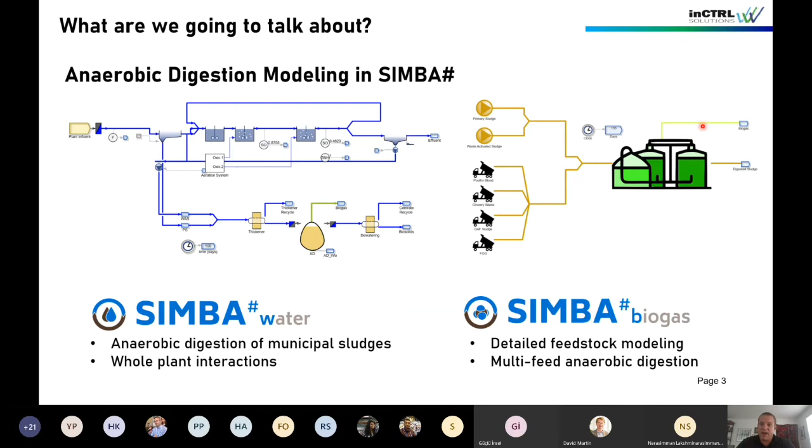In addition to the feedstock side, which is a big focus of today's talk, additional features of SIMBA Biogas are at the downstream end with the biogas handling. So we have a system of piping network, valve blocks, compressor blocks, and gas storage blocks, which can be really useful for the dynamic modeling of how you actually handle and get the most profitable recovery of that biogas for your purposes.

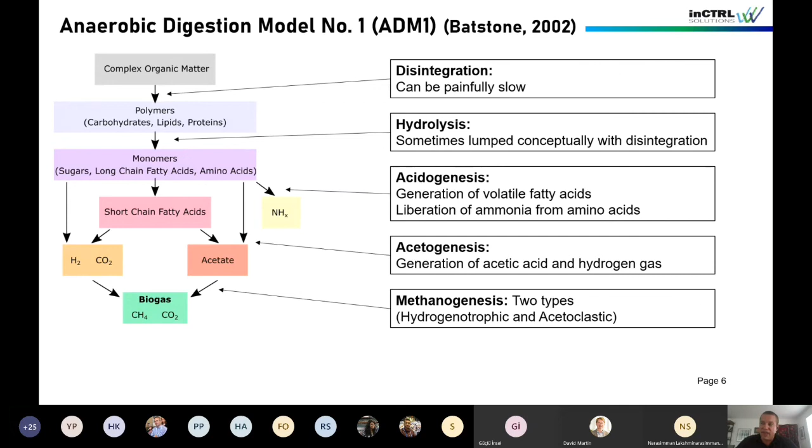And then you have the acetoclastic methanogens that break down acetic acid, both of them generating the methane that we could then recover either for purification into biomethane or the generation of electricity, or in a worst case scenario, you just flare it.

I would just want to say with the caveat, is the anaerobic digestion model one the whole truth? No, absolutely not. Anyone who's on this call who has worked with digesters or who has studied microbiology knows that the microbiology, the consortia, and the types of metabolic functions in these digesters are really complex. You have other elements that are being transformed apart from just the carbon and the nitrogen. You have sulfur and phosphorus and so forth.

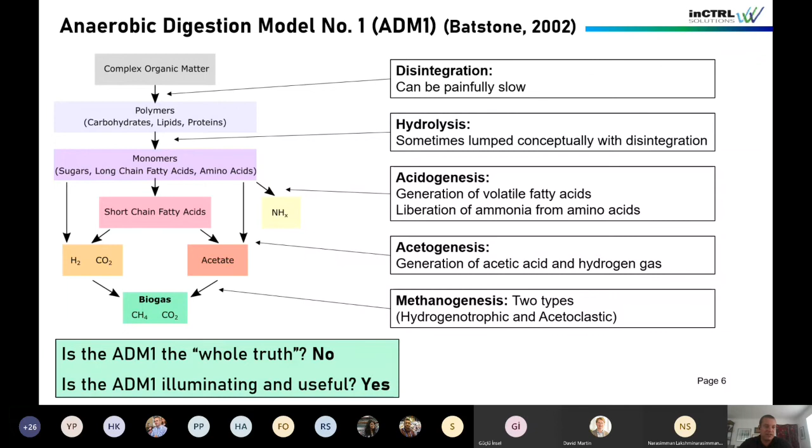But the second point is that even with those simplifications, is anaerobic digestion model one illuminating and useful? Yes, absolutely. It's a powerful stoichiometric and biokinetic model to predict the dynamics and to perform dynamic mass balancing in anaerobic digesters.

What we have done is we've made an adaptation of the anaerobic digestion model one. The main difference is that we allow a more detailed fractionation of that complex organic matter into slow and fast disintegratable carbohydrates, fats, and proteins. And what this allows us is distinct characterization of each feedstock that you're modeling. State variable concentrations affect the process kinetics. So you can see the 42 state variables and then the 30 dynamic processes. And then your processes are going to affect your state variable concentration.

So a bit academic, but if you were to use SIMBA Sharp, this is the model that would be underneath in SIMBA Biogas. You can open this file, you can edit it, you could add new processes, new state variables, change parameters. We often don't recommend changing those parameters, but it is an open software, you could do that. And what a dynamic simulation platform like SIMBA Biogas does is a numerical integration of this entire process matrix to predict the dynamic behavior of an anaerobic digester.

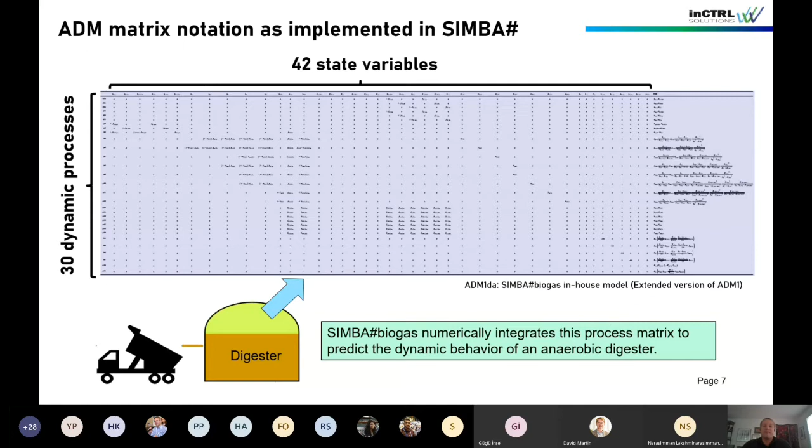So then the question remains, okay, I've got this digester and I'm throwing all this organic stuff into it. How do I turn these glass jars of sludge into variables that are compatible with this anaerobic digestion model? Essentially, how do I map things that I might measure in a laboratory to this row of 42 state variables?

And so what we have is an approach to model feedstocks in SIMBA Biogas where we answer three principal questions. What is this feedstock made of? So what is its organic composition? The second, which we won't go into in too much detail on this call, but we can talk about offline if anyone's interested, is what is the buffer chemistry of the feedstock? So ammonium and bicarbonate, et cetera. And then the last is we know what's in the feedstock, but we need to know what is the degradability of the feedstock. So three main things.

So to answer that first question, we actually go way back. We go old school and we use the proximate system of analysis of feedstocks that was first developed in 1860. Now, this has been debated extensively over the last 160 years, but it holds up really well, and it's a very common system of analysis for animal feedstocks in the nutritional sciences field, and now for anaerobic digestion modeling. And essentially, you're breaking down your feedstock into 6 main components.

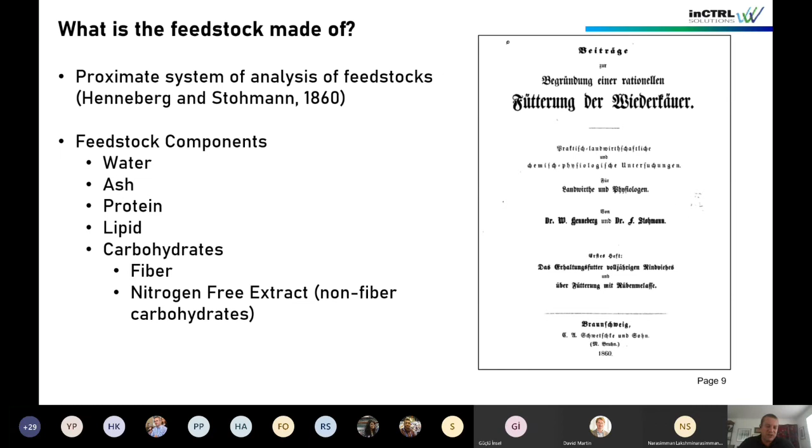Okay, so we'll move on from what's in the feedstock. So let's say you've got an estimation of how much protein, fat, carbohydrate, ash, and water you have in your feedstock. What you wouldn't know yet is whether you can throw that substance into an anaerobic digester and actually generate methane. And so what we rely heavily on when we're modeling feedstocks is the batch kinetic assay that's very common. It's called the biomethane potential test.

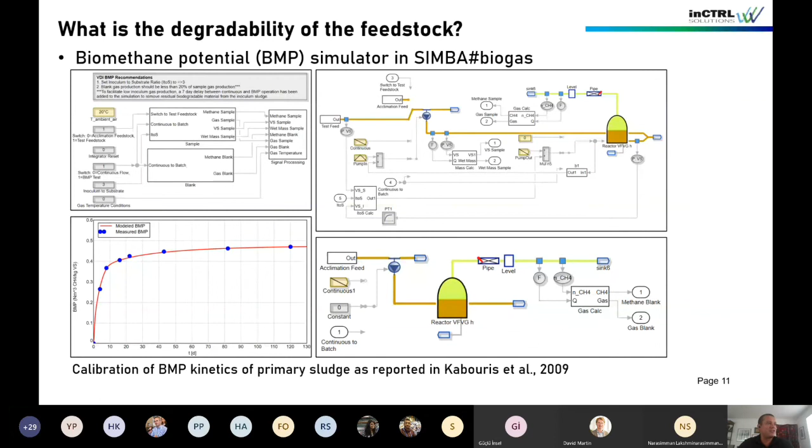And now we can have a very well calibrated sense of how fast is this feedstock going to degrade and what's its extent of degradation going to be in our model. The other images just give you a sense of some of the complexity of what this model would look like in our simulation drawing board. A lot of lines, looks like spaghetti, but with a little bit of time, you can sort of understand how it works in practice.

Okay, so I know that if someone was showing this to me, they'd say, that's great, but generating that data for a bunch of feedstock sounds like a lot of work. And I agree with you. And in some of our initial projects, it was an immense amount of work. In fact, even in municipal wastewater modeling, it's an immense amount of work just to get proper characterization and calibration of your influent. So imagine doing that not for one influent wastewater stream, but for 50 or 60 feedstocks that are coming into a facility on a regular basis.

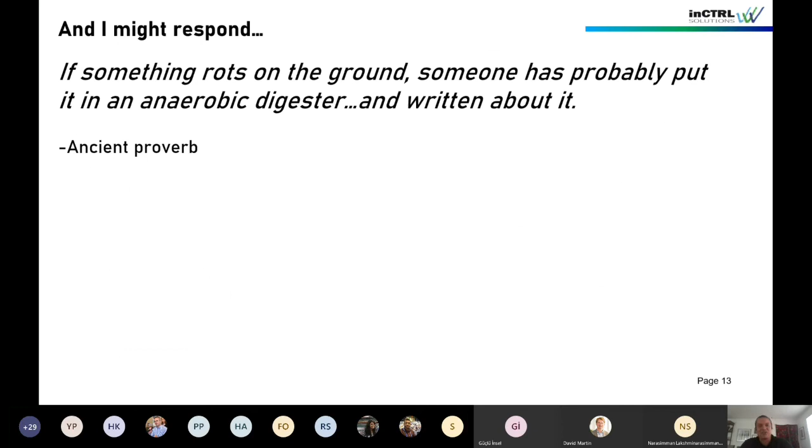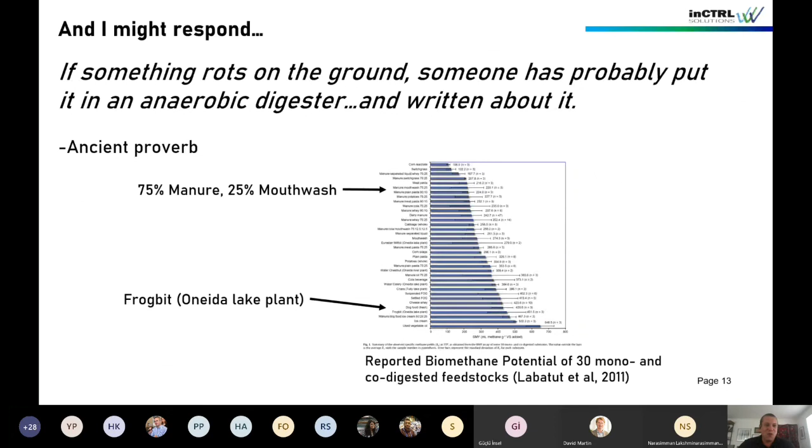And so what we've done as an internal development effort is we are continuously updating a database of anaerobic digester feedstocks. And more importantly, we're going through the effort of data sanity checks, identifying discrepant data, and standardizing that data in terms of units and making sure that we have the variables that we need so that then we can run it through the very standardized, very routine calculations that we would use on those laboratory data to generate the state variables we need to characterize that feedstock in a SIMBA biogas model.

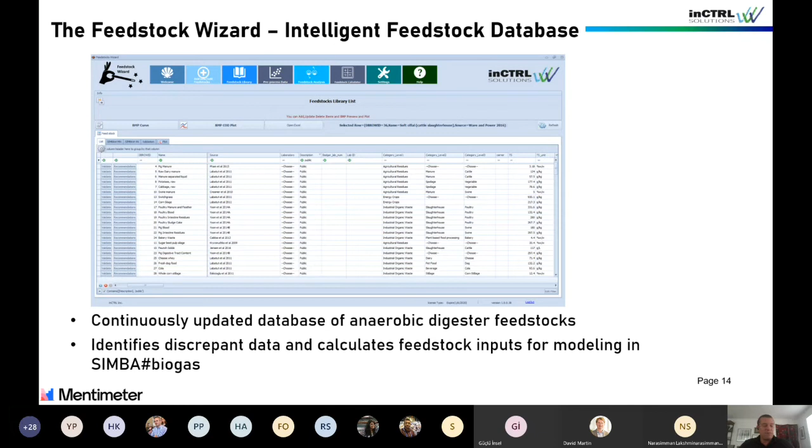And so there are a lot of other use cases for a software like this. But in terms of how it relates to what we're talking about today, which is the predictive modeling of biogas plants in SIMBA Sharp, the most important use case in my mind is to be able to have lab data at your fingertips and not have to take out a notebook or a calculator and calculate all those parameters every single time you want to set up a SIMBA model. And so that's what this software is doing for us; it just automates that process, makes it a lot more efficient.

Okay, so before going on to the case study, I actually want to do something a little different. We're just going to have to see whether this actually works, because I have not done it with this big of a group. This is actually a game. So we're going to compete in a quiz. The questions are not too crazy. You can pick any name you want. You can use the default name, or you could punch in Dr. Fauci, you could punch in Beyonce, anything you like. I'm going to use the default name Joanna, and I'm a koala bear. I won't answer. I don't want to cheat because I wrote the questions. Okay, so we got 26 participants. I think we're ready to start this quiz, based off of what we've been going through.

Okay, answer fast to get more points. Which will digest faster? A piece of raw meat or sugar water?

Okay, I was trying to be generous. We could take our time, but it looks like the text in the question was slow. There were only 2 answers, so it looks as if we've got a complete set of answers. And let's see. Okay, 20 out of 24 got it right.

Yes, sugar water. The reason being is that a piece of raw meat is, again, a complex piece of organic matter. It's going to have to undergo disintegration and hydrolysis before it will go through any of those other subsequent steps of anaerobic digestion. Whereas sugar water, this is already sugar. It's an organic monomer, so it's a carbohydrate that's already undergone hydrolysis.

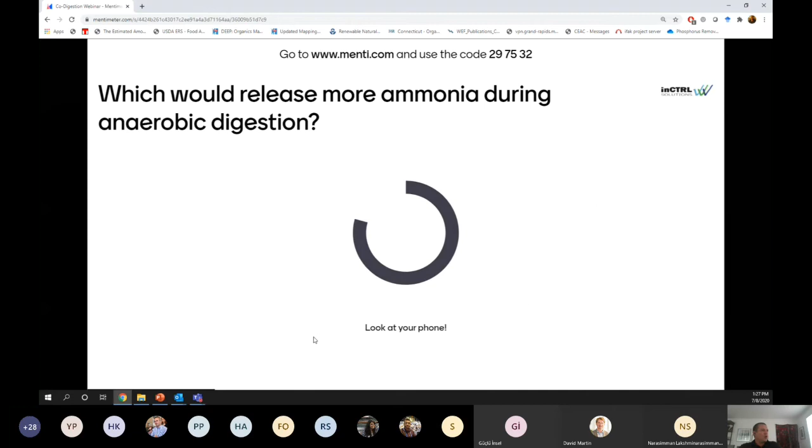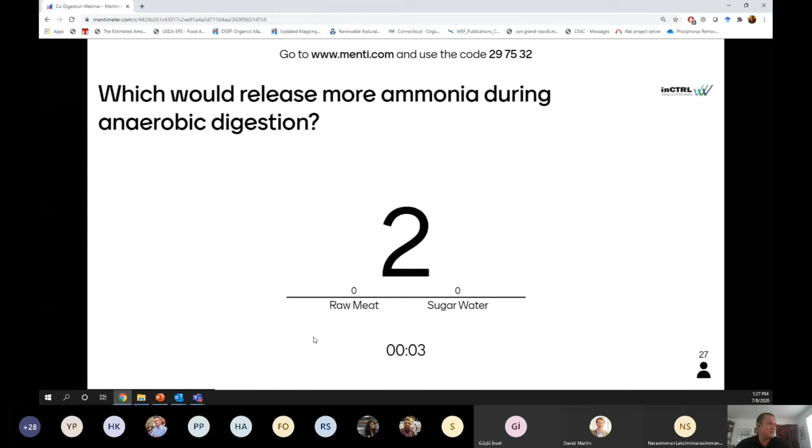Okay, let's move on to question number 2. Which feedstock would release more ammonia into the digester during anaerobic digestion? Again, raw meat or sugar water? Okay, looks like we've got a complete set of answers. Just need a few more seconds before the question times out. And perfect score, 27 out of 27, yes.

For those of you who eat meat, I do, it contains a lot of protein. Sugar water, to my knowledge, contains no protein. And it's the degradation of proteins in a digester. Proteins contain the nitrogen. That's what's going to release ammonia into the digester. This can have an impact on feedstock selection, particularly if you're concerned with the recycle ammonia loads back to your water resource recovery facility.

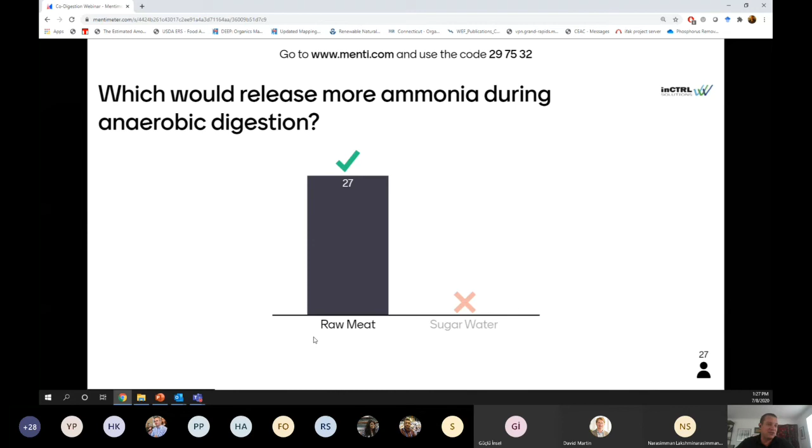Let's see, do we have a new leader? The boss has tied Heartstorm. Okay, well, at least on question 2, Heartstorm still has a 2 point lead.

Okay, question 3. There's a total of 5 questions. Believe me, I'd be perfectly happy to do this for the rest of the webinar, but we do have a bit more technical content. Which has a higher biomethane potential? Hope most, if not all of you, know what these foods are. You've got New England clam chowder, a very hearty soup with potatoes, ham, clams, cream, and you've got low-fat vegetable soup, water, vegetables, maybe salt.

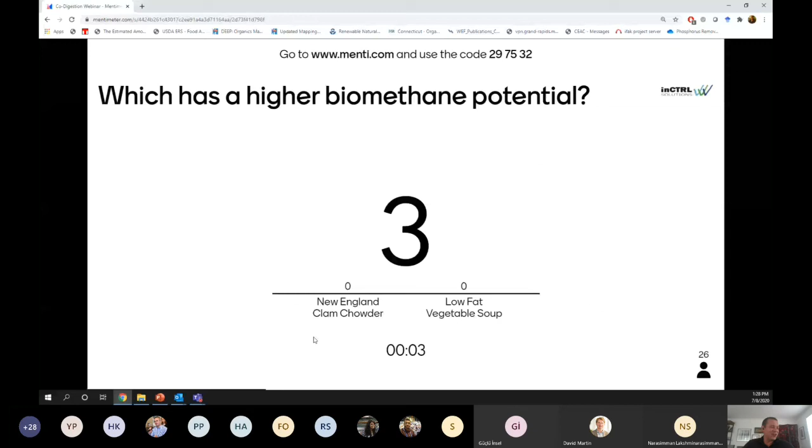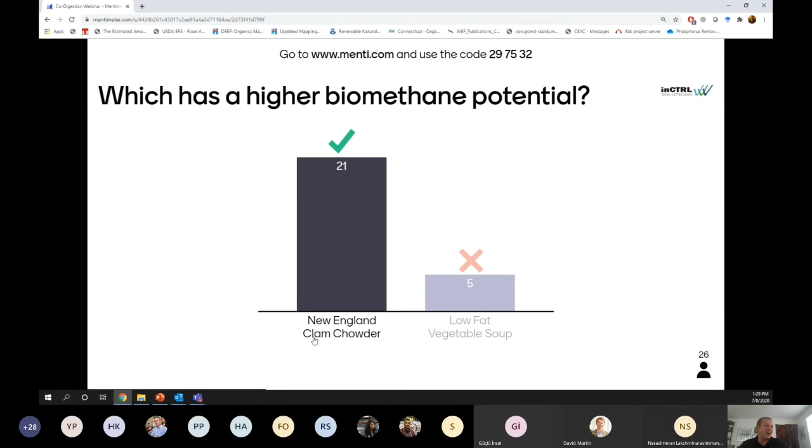Okay, yes. Okay, maybe a little bit culturally biased. I do live in Connecticut, New England, but yes. If you want to know which one is going to release more methane during digestion, a helpful thing to do is just take a look at the nutrition label, look at the calories, look at the fat, the protein, the carbohydrate content. That's going to be much higher in something like New England clam chowder.

Okay, question 4. Well, let's take a look first at who's in the lead. Uh-oh, Boss has claimed first place. Heartstorm has slipped to 3rd. SA is up to 2nd.

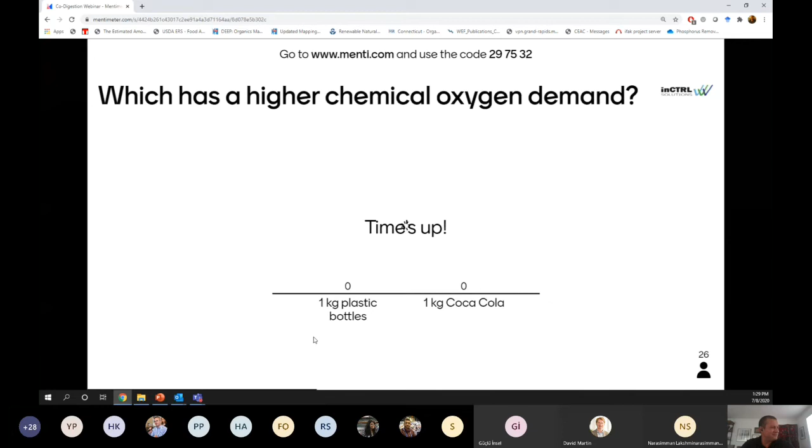Okay, question 4. Which has a higher chemical oxygen demand? 1 kilogram of plastic bottles or 1 kilogram of the Coca-Cola that was poured from those plastic bottles? Okay, we've got our first tough one. This is chemical oxygen demand rather than biological oxygen demand or biomethane potential.

Plastic is essentially 100% organic matter. So it is going to have a very high chemical oxygen demand. If you were to incinerate it, I don't recommend that you do, you would release flames and a lot of heat. Whereas with Coca-Cola, even though it does have a high sugar content, it still is mostly water. So the actual organic content of Coca-Cola is relatively low compared to plastic.

So let's see, I got a feeling that whoever answered that first is probably going to hit first place. Okay, SA has pulled into the lead.

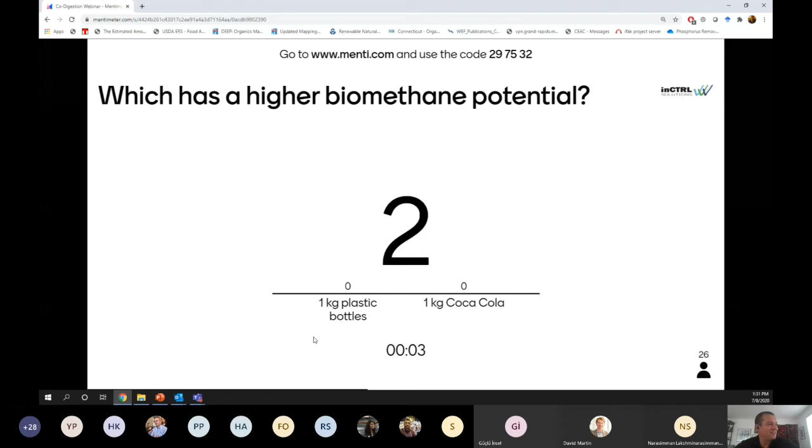Okay, all right, last question, and it's related to the previous one. Which has a higher biomethane potential? Again, 1 kilogram of plastic bottles or 1 kilogram of Coca-Cola? Yes, Coca-Cola. Coca-Cola is biodegradable. Generally speaking, plastic is not.

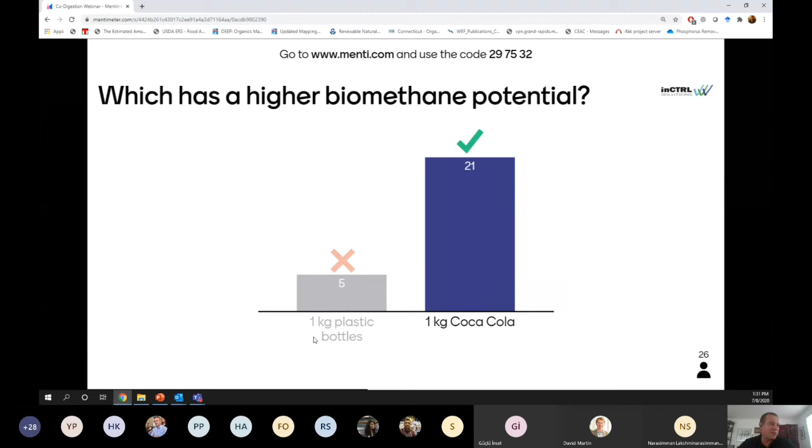There may be some newly developed plastics that are biodegradable. If that's what you were thinking when you answered it, I apologize. But in general, I would not recommend putting plastic bottles into your anaerobic digesters. There are companies, especially equipment manufacturers, who sell a lot of pieces of machinery just getting all that plastic crap out of your feedstock so you can put them into your digesters without problems.

Okay, so who is the champion of our anaerobic digestion quiz? It is Mr. Anderson. Okay, Mr. Anderson, if you want to reveal your identity at some point during this webinar or after, please do so. But congratulations and excellent job on our co-digestion feedstock quiz.

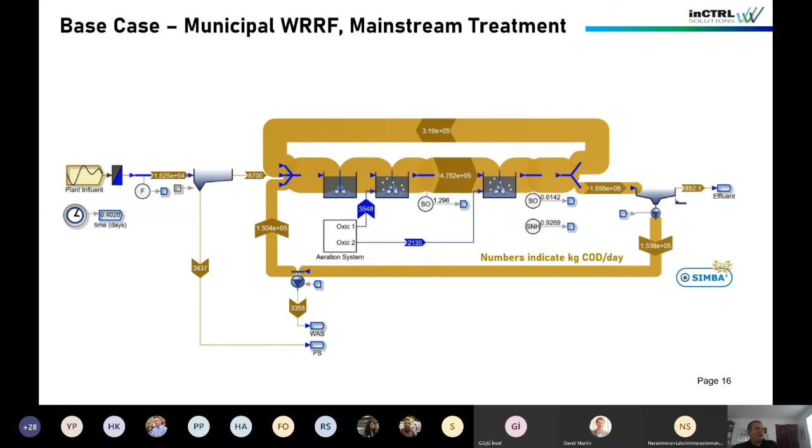Okay, back to more serious matters. Right now, what I want to do is go through a hypothetical case study of co-digestion at a municipal water resource recovery facility. Okay, so we'll lay out some of the facts, the base case about this facility. What we have is a flow rate of 20,000 cubic meters per day, as a rough estimate. That's about a town of 50,000 people in the United States. A COD load of 12,000 kilograms per day, and a total Kjeldahl nitrogen load of 1,000 kilograms per day.

We've got our activated sludge process, and if you tuned in for webinar 1, which was Oliver talking about aeration system modeling, and you run this facility, you've already optimized your aeration system, you've got really good diffuser distribution in your 2 aerobic tanks. You've applied most open valve control so that you can supply air at the lowest possible energy.

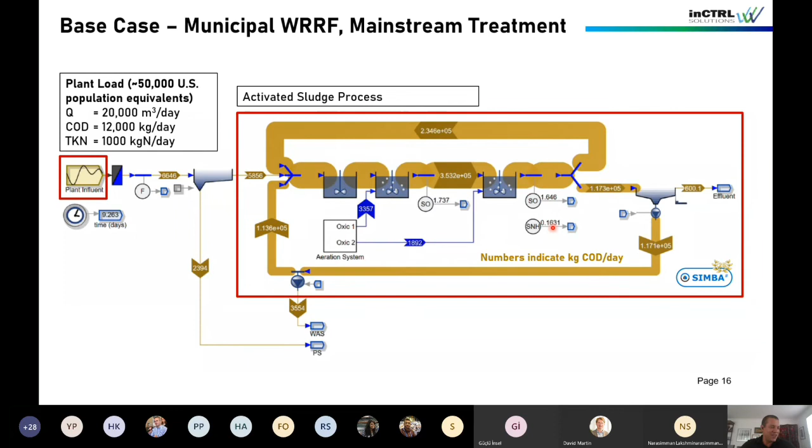Then you followed up by watching Live's webinar, which was a few weeks ago. You've got your online sensors deployed, your dissolved oxygen sensors and your ammonia sensors. They're commissioned, they're well maintained, they're measuring accurately, and you're confident enough in them that you wired them up into an ammonia-based aeration control system. And so you've got a really nicely operating plant for total nitrogen removal.

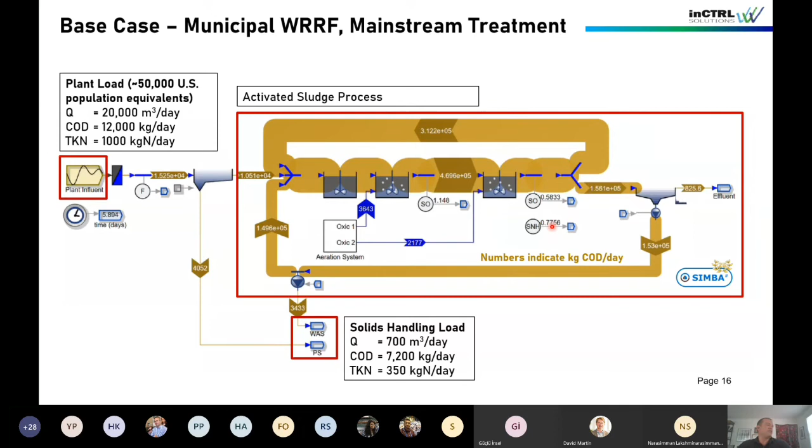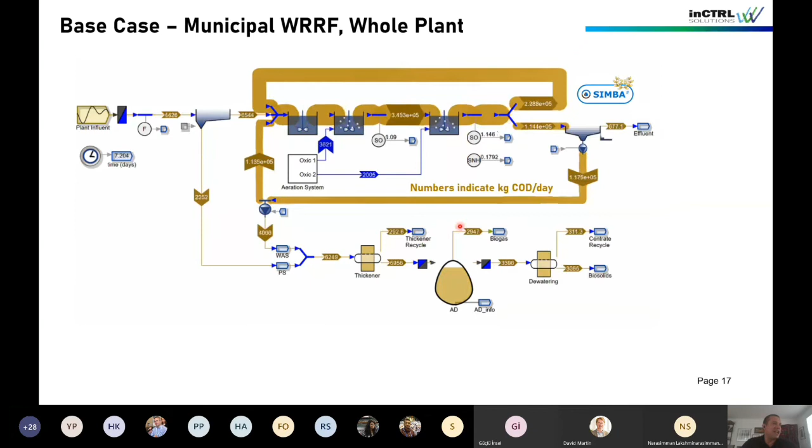Okay, and now in your path towards optimization, you're looking at your solids handling. What you've got right now is sludges from your waste activated sludge line and your primary sludge line of 700 cubic meters per day, COD of 7,200 kilograms per day, and a total Kjeldahl nitrogen load of 350 kilograms per day. We zoom out a little bit to take a look at the solids handling line. We've got a thickener. Downstream of that, an anaerobic digester. Then you've got dewatering of your digested sludge, and then you're recycling your centrate and your thickener recycle back to your activated sludge plant, and you've got to dispose of your biosolids.

Okay, you take a look at just some of the basic operating conditions of your digester. Your solids retention time is 27 days. Your organic loading rate is 1.6 kilograms of volatile solids per day per meter cubed. And if you take a look at your biogas expressed as COD, because methane has COD, you can combust it and see how much oxygen it has, if you don't believe me, you're recovering about 25% of that relative to the influent COD load.

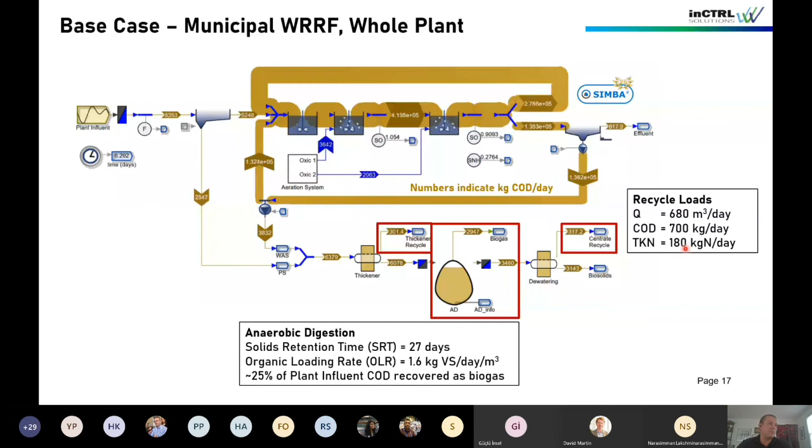Okay, and then a couple of things to look at in terms of anaerobic digestion and some of the recycle loads. Relatively small flow rate. It's kind of big here because you're also looking at the thickener recycle. Your COD load is relatively modest. What you've got to be careful about is you're going to be recycling quite a bit of nitrogen back into your mainstream plant. And so in this particular case, it can increase the load back into your activated sludge process by about 18%. Okay, and then you've got to dispose of 14 cubic meters of biosolids each day. So maybe about 15 or 16 short tons.

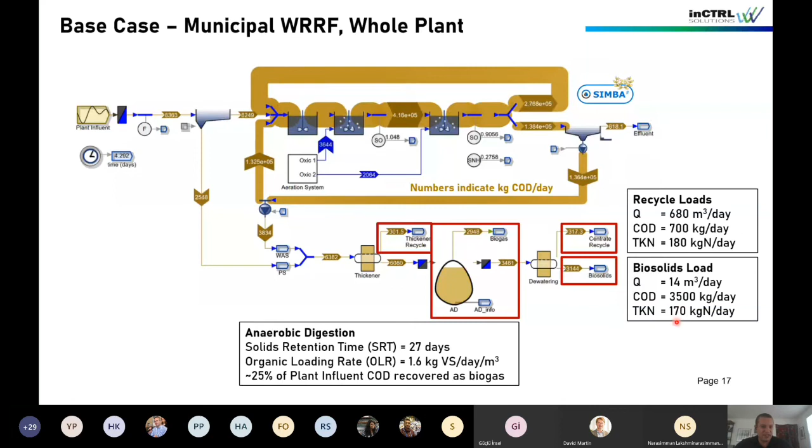Okay, so we take a look a little bit closer at the solids handling line, and these are all simulations in SIMBA water. We do a little bit of calculations with some standard assumptions and constants available in the literature. Assume 35% of that methane is going to be recovered as electricity in your combined heat and power unit. And so this facility that treats wastewater for 50,000 people, we're predicting that it's going to generate 3,700 kilowatt hours per day of electricity. That's about enough for 125 households in the United States.

So last session on the Mentimeter interactive software, most important question of the day. Give me just 1 second. Do you want to make more biogas at this facility? Okay, I thought so.

Okay, but let's see, we're at 1:36, so we've got a little bit of time. So let's answer an open-ended question. This one isn't multiple choice. I'm gonna jot down a couple of answers. Maybe some of my colleagues at inCTRL will answer. If you guys have any thoughts, if you're experienced with this, or if you've been studying it and you feel comfortable, why don't you just type in some short answers? So basically, what do you need to consider before pursuing co-digestion at this water resource recovery facility?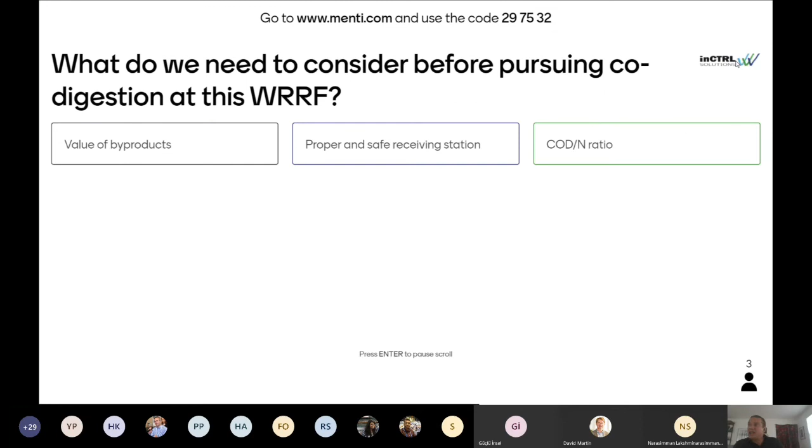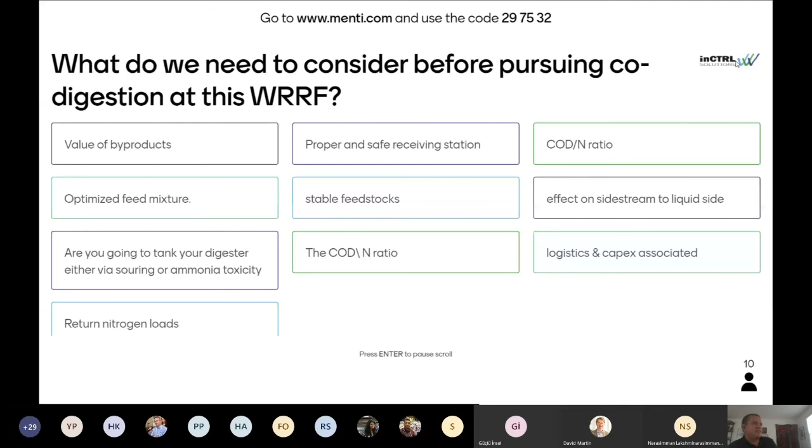Okay, so we've got the value of the byproducts. So I'm assuming by byproducts, you're talking about the biogas, potentially the value of the biosolids, or maybe the cost for disposal of those biosolids. I'm just going to jot down, let's see, return nitrogen loads, stable feedstocks, COD to N ratio, logistics and CapEx, effect on side stream to liquid side. Yeah, that's a good point. The BMP of the co-substrate, the organic loading rate of your facility.

Yeah, feedstock treatment. Are you going to need pre-treatment, or is it going to come to you ready to load? CHP and purification capacity. Yeah, that's a good one, because how much capital investment you need to make to be able to deal with higher gas concentration. Okay, let's see. Proper and safe receiving station. Yeah, that's a good point. Are you set up so that you could take 10, 20, 30, 40 trucks coming in and out of there every day?

Okay. Let's see, are there any other... uptime of digester and whether co-digestion can affect the biology and increase downtime? Okay, so the idea that maybe you won't be able to operate stably anymore if you start loading it more aggressively with co-digestion feedstocks.

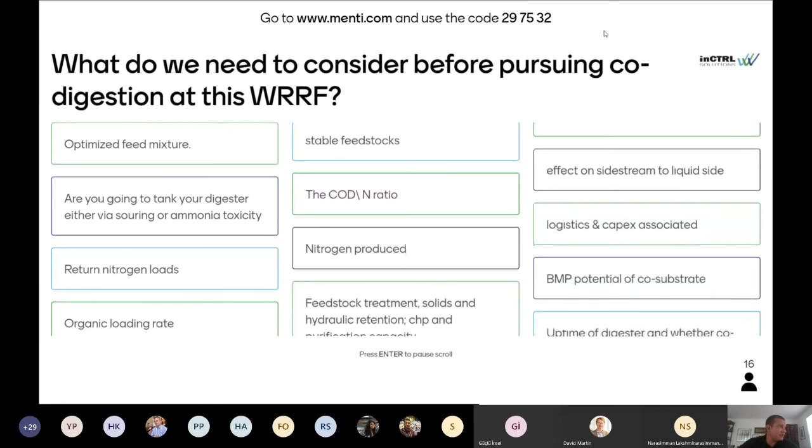Okay, no, this is really good, and I appreciate everyone who was able to provide input. In the interest of time, I'm gonna jump back to the presentation and wrap things up, and then maybe we'll come back to this during the Q&A session if any folks want to do some more detailed follow-up on some of these comments.

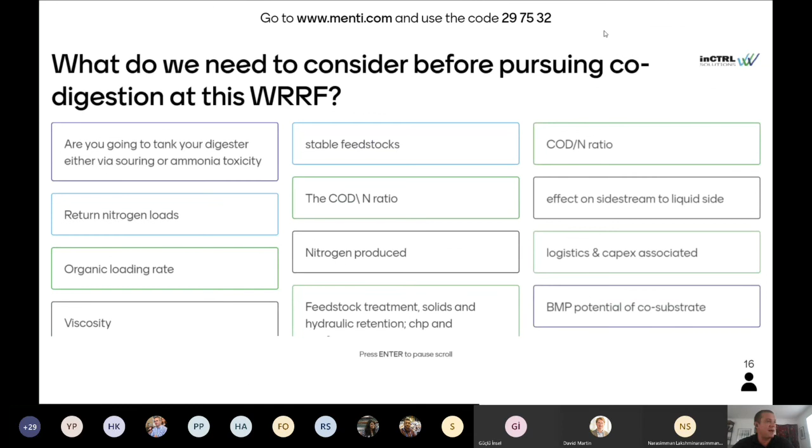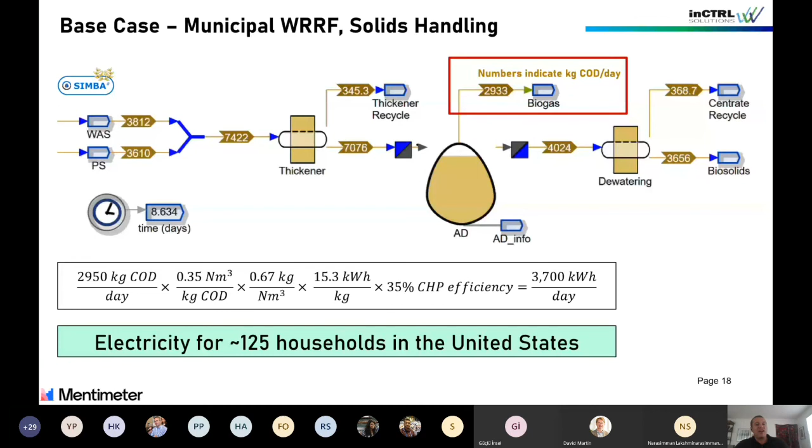Okay, so we've identified that at least on an organic loading rate and solids retention time basis, it looks as if this digestion system has spare capacity to take in co-digestion feedstocks. And so let's say that you've also satisfied many of the other criteria that we collected on that interactive slide just a couple minutes ago. One of the next things that you're going to need to do is figure out, well, what's available to me to load into this digester. So for starters, let's just take a look at what our baseline is.

We've got combined thickened water resource recovery facility sludge coming in at 43,000 cubic meters per year at a volatile solids content of 4% by weight, a moderate to low BMP at 295 normal meters cubed of methane per ton of VS. You got a carbon to nitrogen ratio of 10 grams of carbon to nitrogen. And then we take a look and we see what's available in our immediate vicinity. What are people trying to get rid of where we might be able to help them out?

Okay, so one, and I've seen this in a couple of case studies. For some reason, some people have access to poultry blood. I'm surprised because it kind of has value as a fertilizer, as blood meal. But I think sometimes maybe it's either off spec or people are producing more blood than the fertilizer industry can handle. So let's say you've got 2,900 metric tons per year of poultry blood available.

The reason that I would consider this a very high value feedstock is that it's relatively uniform. You're not going to have much of a risk of a bunch of like forks or other stuff that you might see in consumer waste. A really high organic content. So on a wet weight basis, it's 20% organic solids. And from the literature, that's a pretty good biomethane potential of 500 normal meters cubed per ton of VS. The one thing to look out for is blood has a lot of protein in it. So a C to N ratio of 5 is really low. That means you've got a lot of nitrogen.

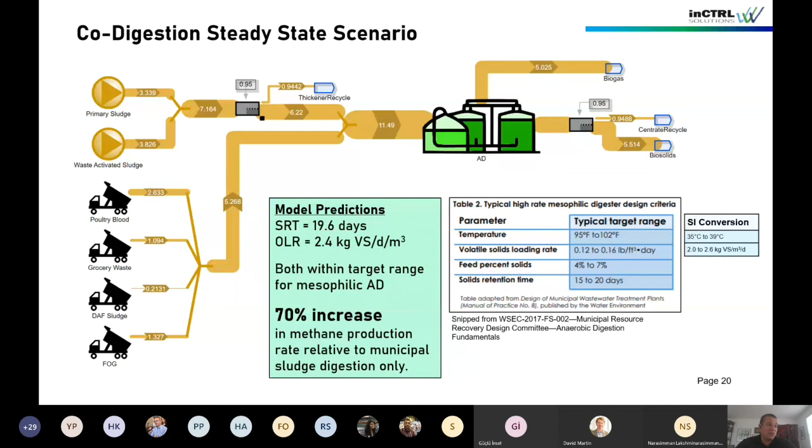You may be getting some significant gate fees for taking in these wastes. And then you're getting a 70% increase in biogas production, and if it scales linearly, you're going to get a 70% increase in electricity generation. So fantastic. But the thing that we really need to be aware of, and it's something that we see in virtually every project that we work on, every anecdote that we hear, is that feedstock loading rates are rarely, if ever, constant. And it's due to two important facts.

One is that people don't like to work on weekends. I know I don't, and most people don't. So what's often going to happen is your co-digestion feedstocks are going to come in on weekdays, often, not every day, but just a couple days per week. And then you're going to get this delivery gap on Saturday and Sunday.

Okay, and then the other one that's more important, and much of it is encompassed in our modeling approach, but not all of it, is that people who generate waste are not in the waste generation business. They're beverage companies, or they're cafeterias, or they're other food production companies. The waste is just an unfortunate byproduct of their business. So it's not necessarily going to be uniform, and it's not necessarily going to be available on a regular basis.

And so this poultry blood is a representative example of something that you only get sporadically. So you may go 30 or 40 days without getting any, and then all of a sudden they have a problem on their production line, and they've got to get rid of just like a ton of poultry blood for 10 days. And then they fix whatever is going on at their facility, and then you don't get it for a long time.

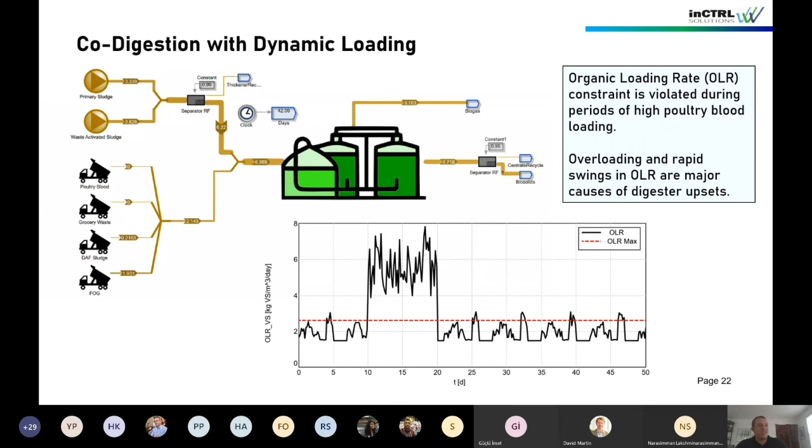So even if this didn't totally devastate your digester, let's say your digester for whatever reason can handle that swing in load, what you're still going to get is a rapid swing in biogas production. And that's really difficult to match with your downstream electricity generation equipment, or your biogas upgrading and purification equipment. And what this often, if not always, leads to is a lot of biogas flaring.

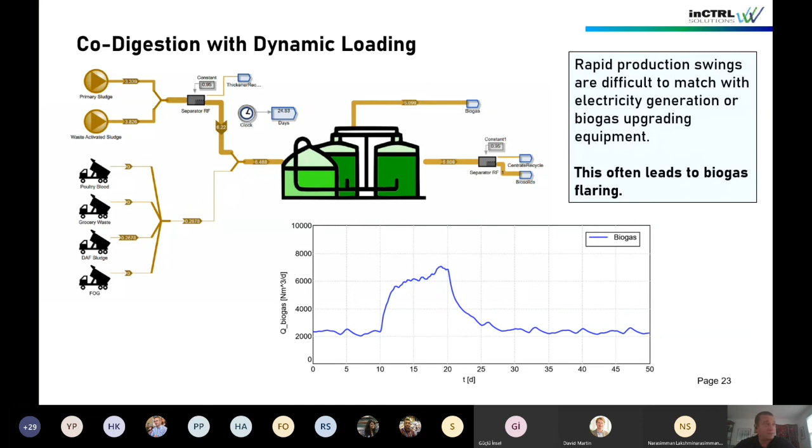So all of that increased revenue, or increased electricity, or increased sustainability that you expected to have at your plant basically just goes right into your flares, because your equipment was not designed to handle those swings, and your system or your operating strategy may not be ready to deal with that much volatility in loading rate. So that concludes that hypothetical case study.

Just one last bit of technical content before wrapping up this presentation. We are doing this work. So what I'm showing you now is a case study that we're currently working on. This is a large North American co-digestion facility. They're doing dynamic loading of 17 unique co-digestion feedstocks, along with their primary sludge and thickened waste activated sludge.

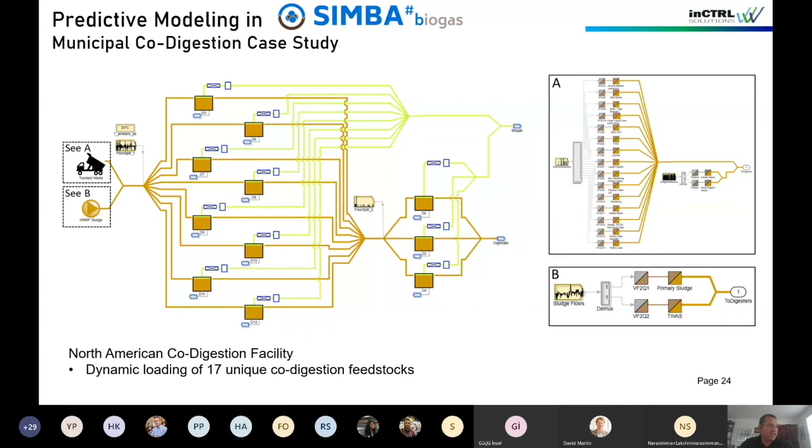We're going to provide a lot more detail on what this work entailed and what the results of it are during WEFTEC. So we've got this abstract submitted and are working on the manuscript, so that will be available for you all very soon. But the key takeaway from this study is that when we do a rigorous job of looking at client feedstock data, and then comparing that to literature feedstock data, and then accurately simulating the delivery dynamics of those feedstocks to the plant, we can do an excellent job predicting the biogas production dynamics. So we're pretty spot on, and these are preliminary results.

And so the question that remains, and it's an eternal question, is, okay, we can predict biogas production. What is the value of that? Well, the value goes back to the flaring that you see, is that plants, generally speaking, cannot handle this much volatility, this much up and down in their biogas production rates. Not the spikes during weekdays relative to weekends, and not also some of these higher resolution peaks that happen when you get some rapidly biodegradable feedstock.

So the question is, and it's something that we plan on working on more, is what sort of design and operating strategies can we work on to try to turn that red and black jagged line into a flat line, so that people who are doing co-digestion can recover a higher percentage of their biogas for profitable, useful purposes.

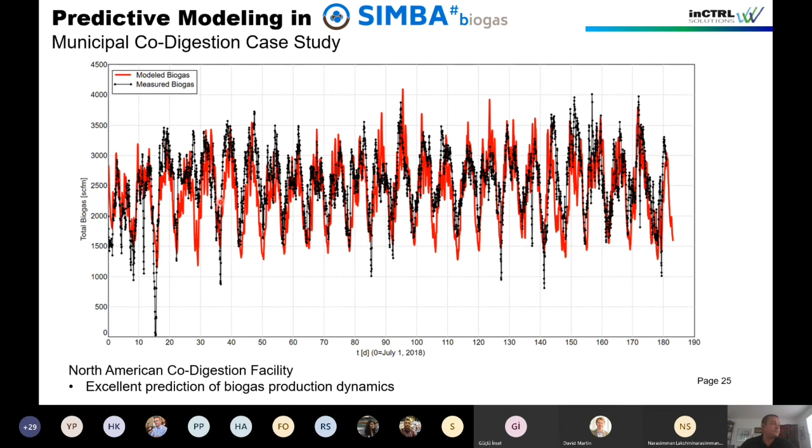Okay, so to wrap up, three main takeaways. Co-digestion can obviously significantly increase biogas production at water resource recovery facilities, but it also introduces greater complexity and risk to facility design and operation. And one of the main reasons for that is that you're taking in a whole lot of different feedstocks, and those are coming in discrete batches. And the people who are providing that waste for you are not necessarily in the waste generation business. So you get what you get when they've got it.

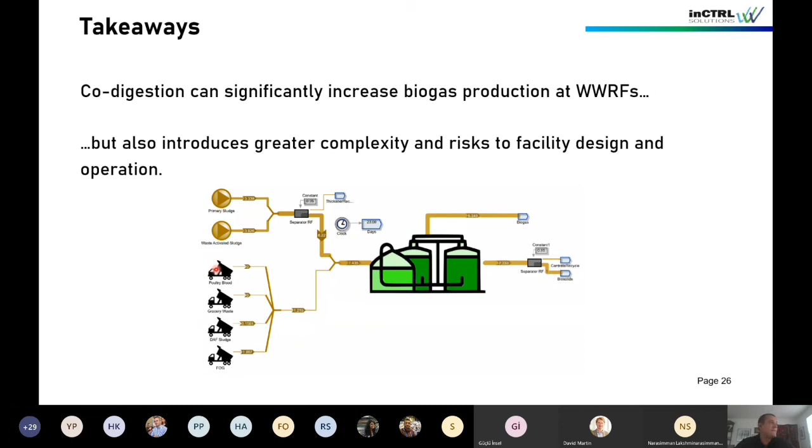Okay. Second is that there is a vast body of knowledge on predictive modeling of anaerobic digestion and the characterization of feedstocks. And so we can go back to laboratory protocols from the 1800s that have been changed only very little over the last 160 years for the characterization of feedstocks. We can apply that knowledge about feedstocks to input those state variables into dynamic models such as ADM1 or our in-house model, the ADM1DA. And so when we standardize that information and when we encapsulate it into a piece of software, we can start making very good dynamic predictions of how these complex large facilities function. And that's really the key purpose of what we're doing in SIMBA Biogas.